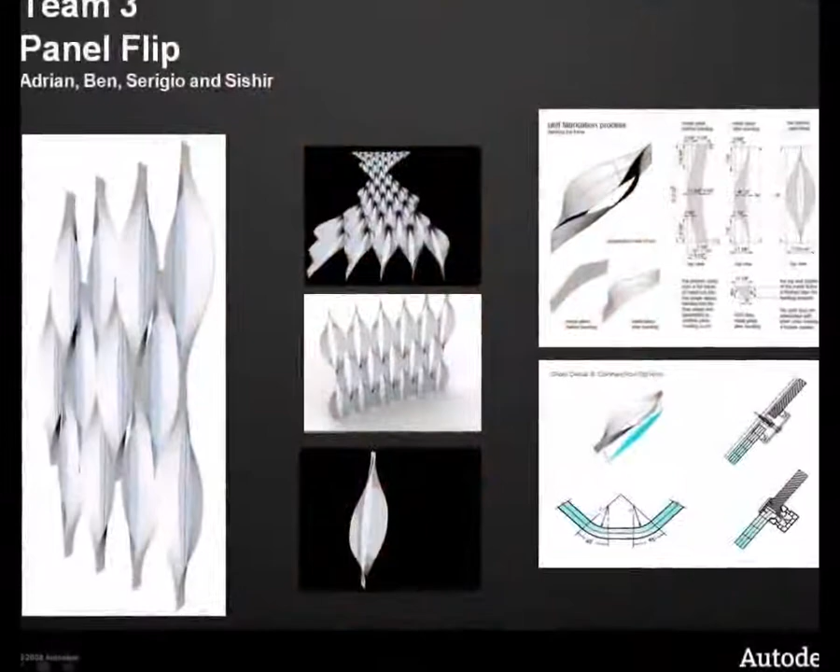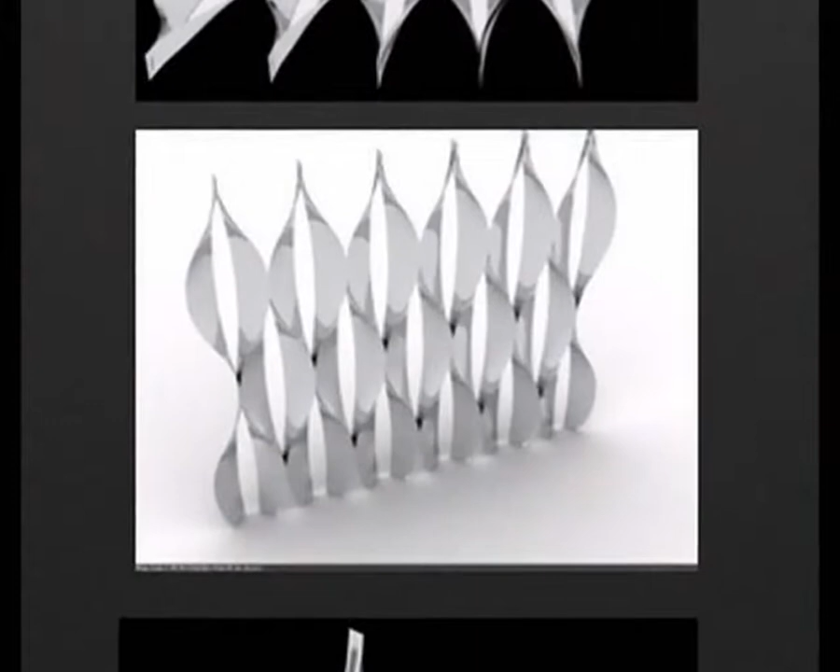A thumbnail project is basically taking some kind of inspiration from either an unbuilt project or a sketch that had come up in other architects' work. So we all went around and looked on the internet and in books for examples of projects that were exciting in some way, and found a way that we could capitalize on that and make it our own, with our own detailing of this original concept.

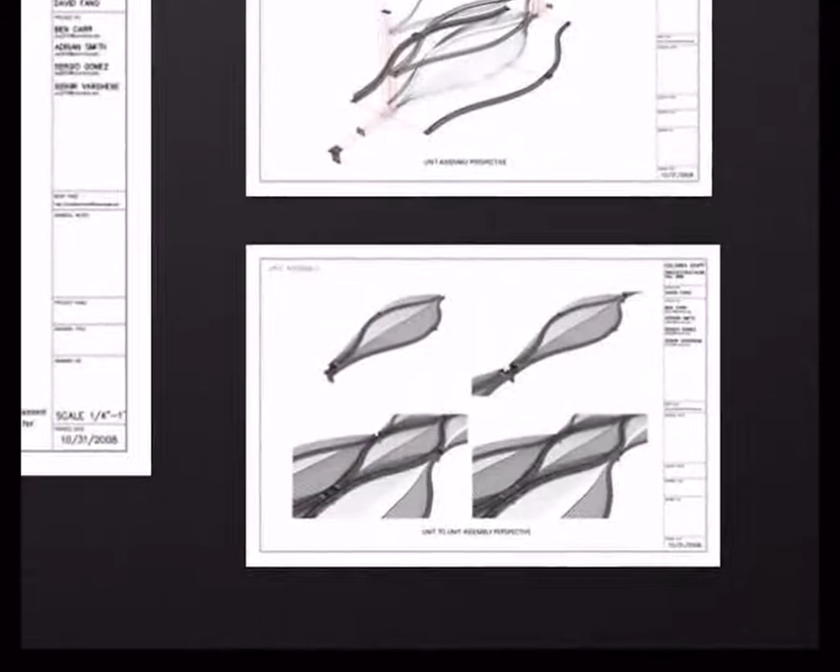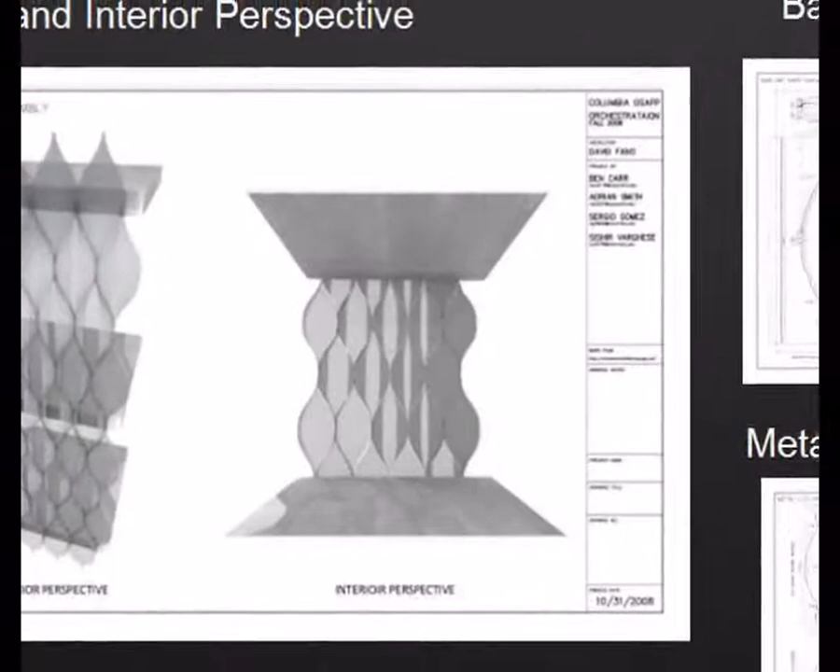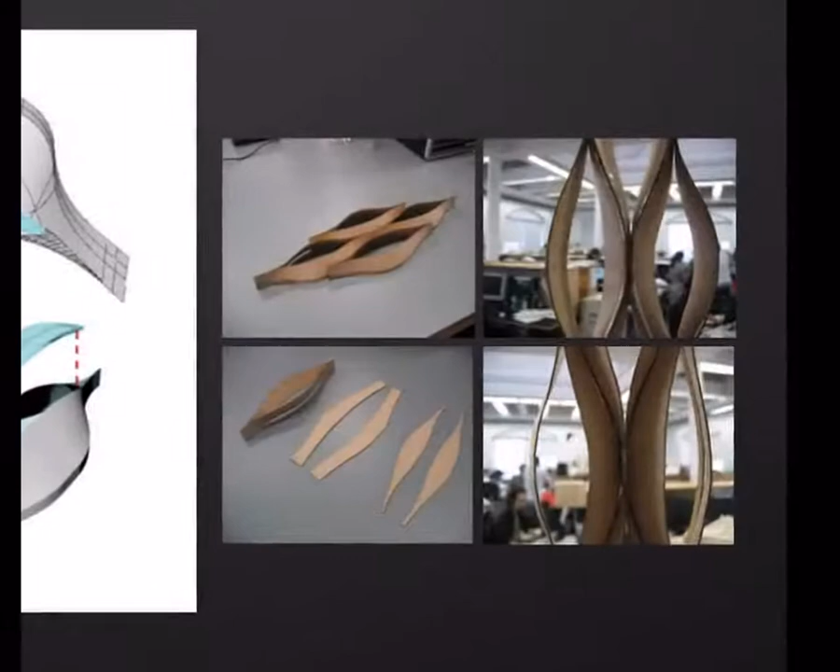What our group actually did, our blog was Orchestration FO8, but we had an original scheme from a project by Foreign Office Architects for a swimming pool, a roof structural system which wasn't really a unitized system or a curtain wall at all. It was really just a formal gesture that we liked. So we took that and completely translated it into a curtain wall, putting it in a completely different orientation, and eventually a completely different form, just because it came out of this original teardrop shape that we liked. It then translated into a whole different thing, which we now have complete authorship of, even though originally it was somebody else's project.

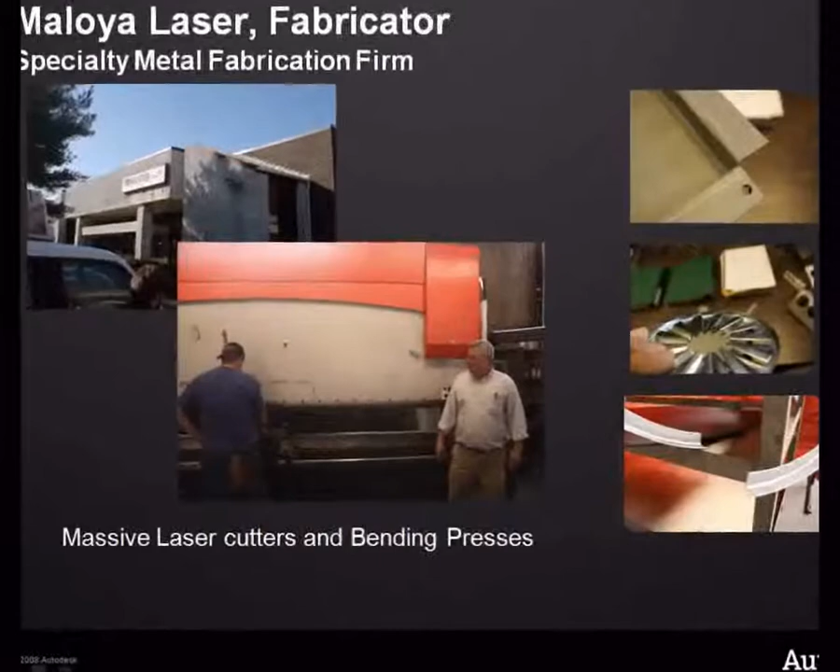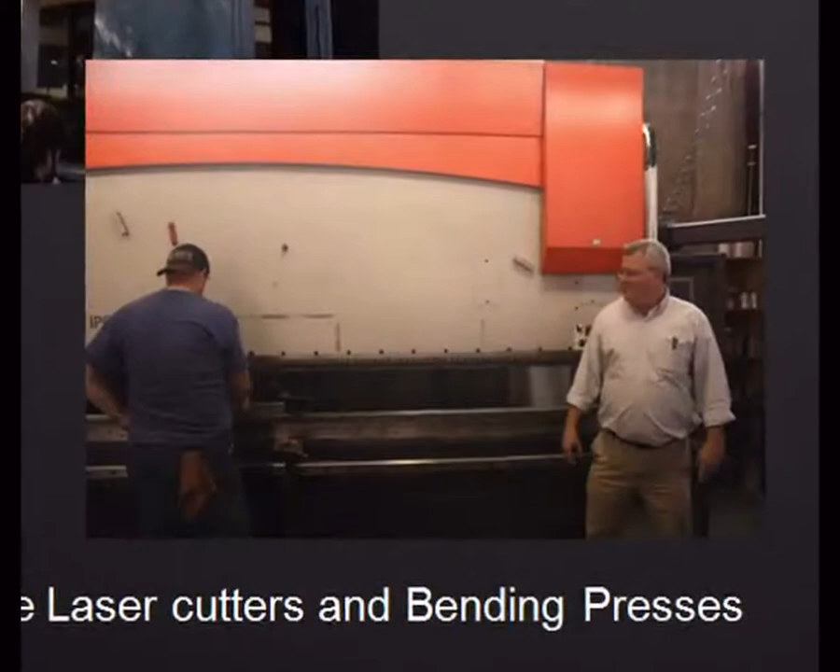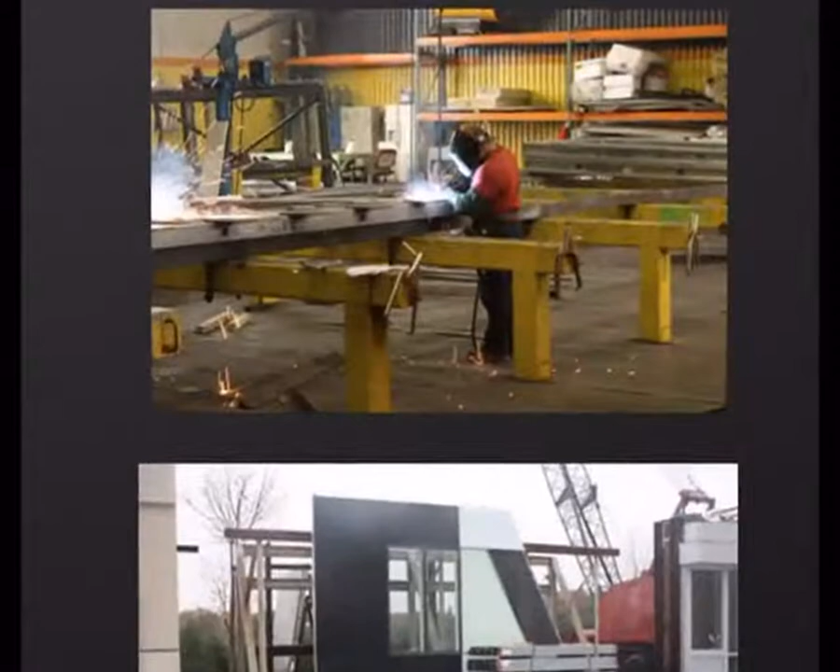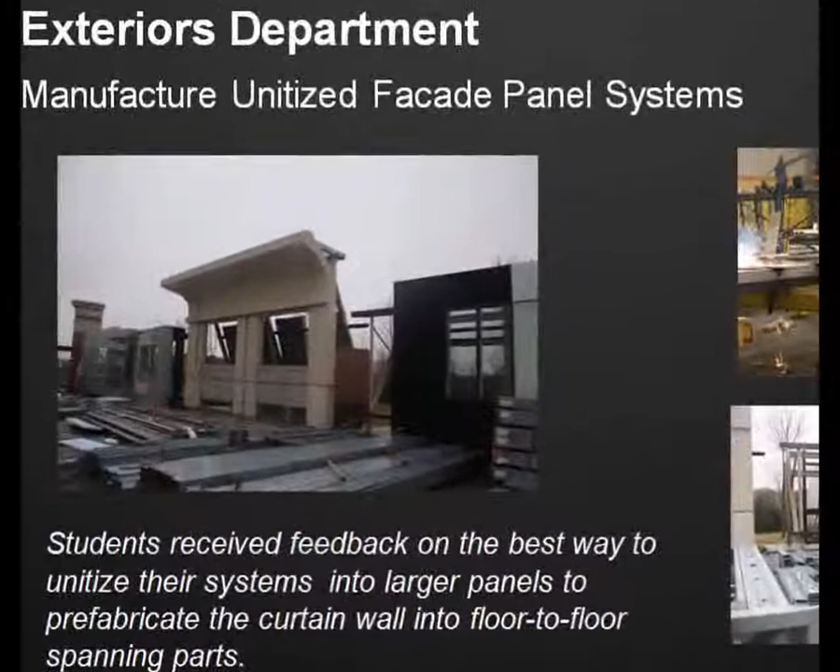So it was different from what I think a traditional design-build studio would be more like. You definitely had the interaction with the fabricators. In prior design-build experience, what we did was more like we just figured out in our heads, like, let's just try this and let's just try that, without having the better knowledge and the real-world situation where you actually go out to a fabricator and have a dialogue with those people. I think that's really important, and I think that's what made this class actually better than an actual design-build.

One of the fabricators we went to was called Maloya Laser, and they just do laser cutting of metal. So it was great to see exactly the kind of parameters that they deal with — things like how big the beds of the laser cutters are, and how big the sheet metal comes in standard sizing, and things like that. So that factors into the whole design process, because you don't want to design something that's going to be impractical just because it happens to be six inches longer, since that's an arbitrary number you gave to it.

If it can fit within these particular parameters, and you can embed that kind of logic into the modeling process, then it'll streamline everything down the line. So if you know ahead of time what your parameters are going to be for the manufacturing, then it helps tremendously once you actually try to get it built.

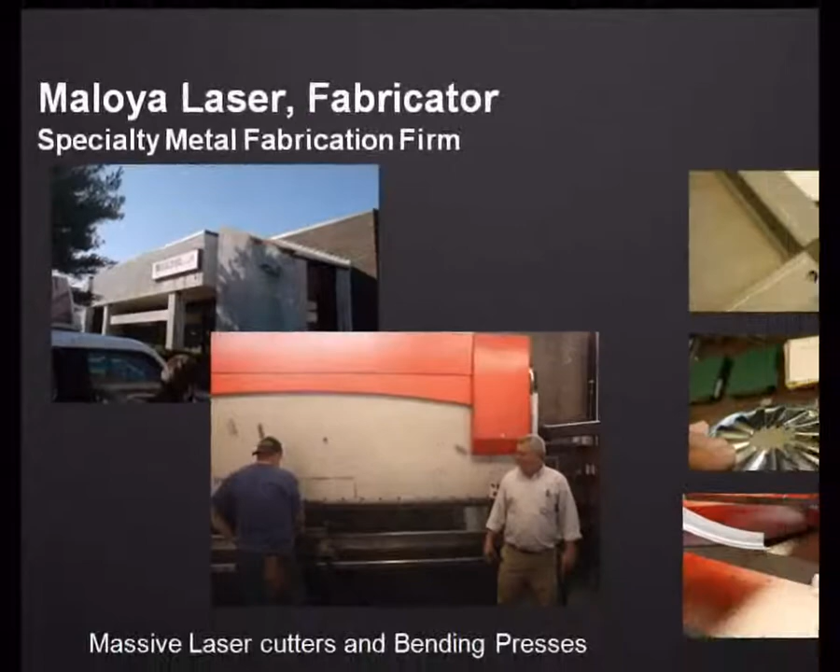Debra's conversation with the students now shifts back to Chris Powers for the final portion of this slidecast. In the segment that follows, Chris responds to Debra's request that he comment on what he sees as the future of building information modeling, especially as it applies to working with other disciplines such as fabricators.

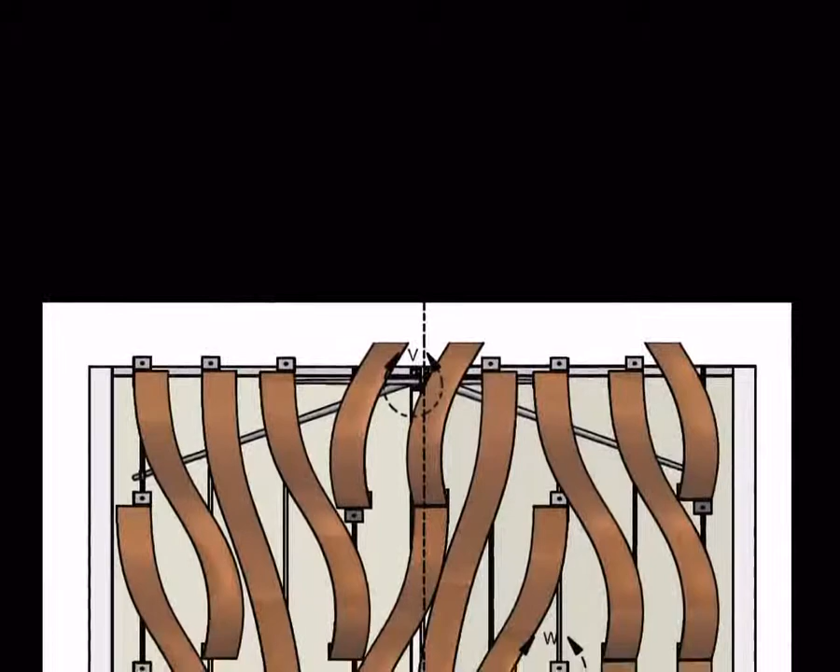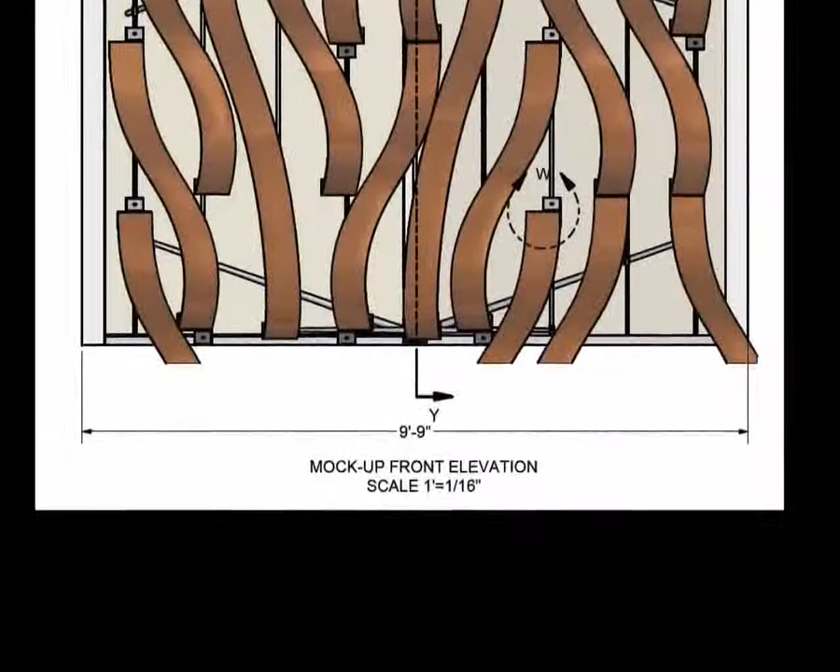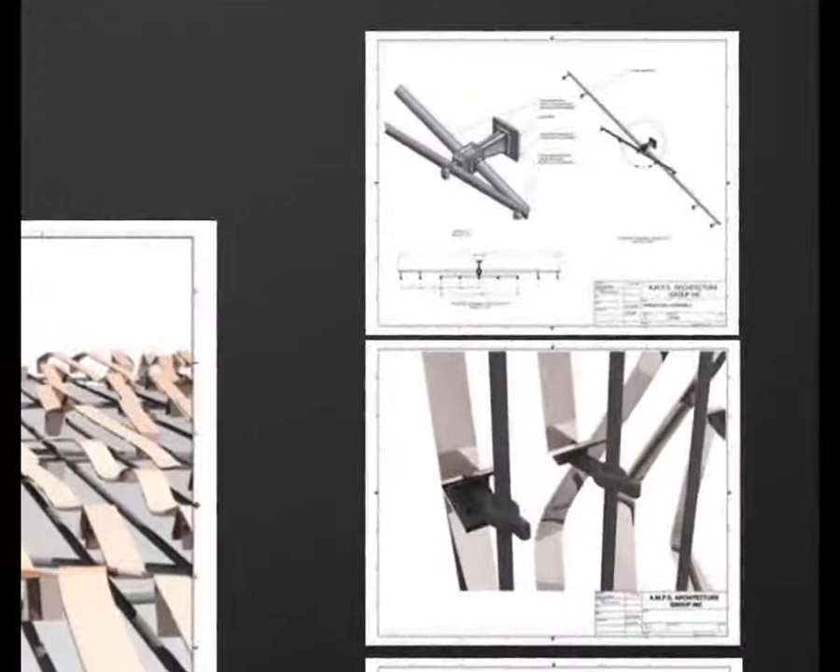I'm really looking forward to the use of this BIM, building information modeling, which Revit touches on, and I'm really hoping that this Inventor program kind of gets incorporated into that, and having almost a seamless interface between fabricators, architects, engineers, and contractors, really giving them a common language to speak with, because just by understanding the software and how these pieces get put together, I can understand how the fabricators can put them together.

And he can understand how I've designed this because he knows how the program works. And he knows, oh, if you could do this, it's only slightly different - it gives you the same look, but it's easier to build. By using that kind of common language, I think it gets rid of a lot of the misconceptions, a lot of the differences between the two different fields, and is really going to lead to hopefully a seamless interface.

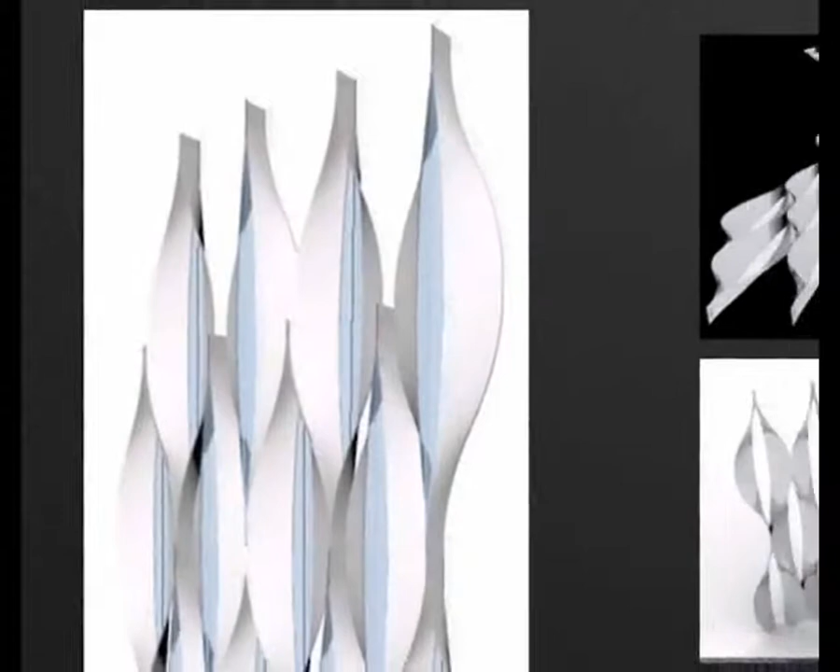that we can go back and forth using the same program, same file, just trading the file back and forth, doing small little alterations and really being able to communicate effectively. And that's really the key. So this fabrication process is communication, and to give another tool for that communication is a really great experience.

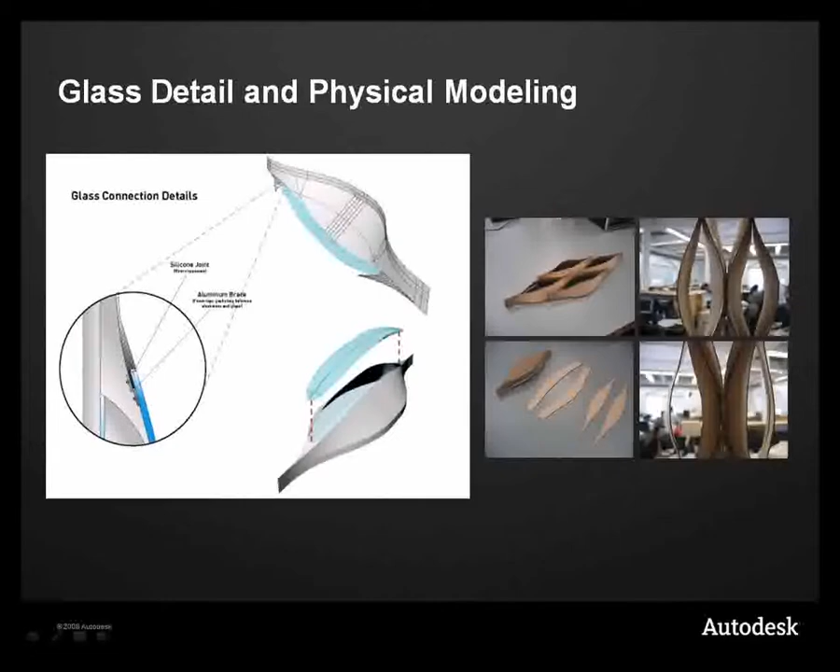To conclude, Debra asked Chris what advice he has for students entering the architectural program.

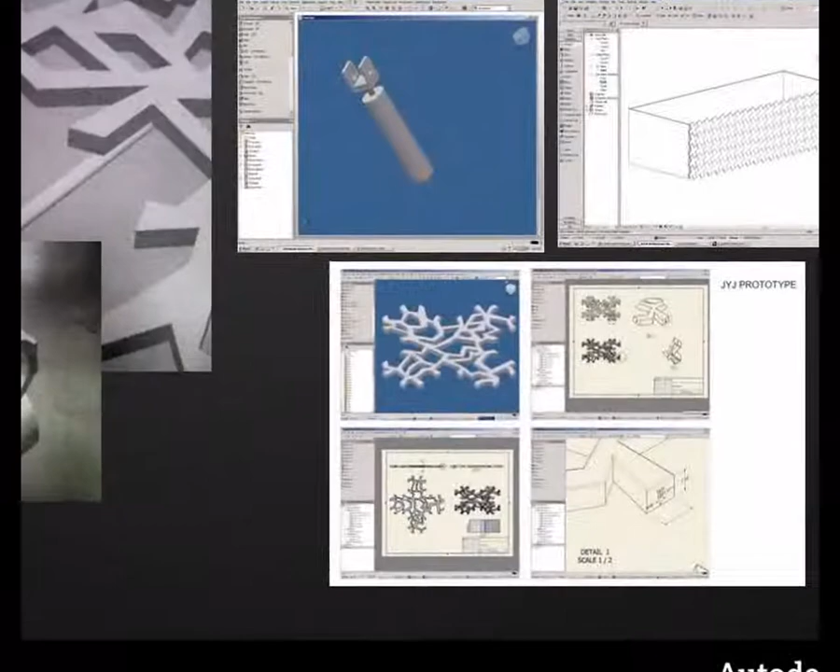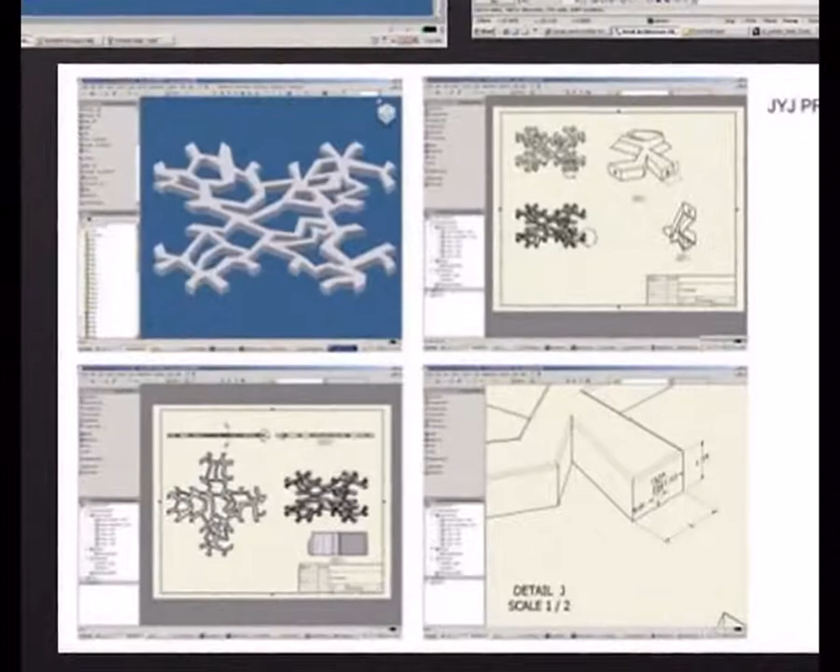The biggest advice I would give them - in the couple years that I've worked as an experience, one of the things I've learned is the construction industry is really kind of segmented as much as it is dependent on each other. So contractors have extreme problems with architects. Architects have problems with engineers. And this is all based on the fact that each person is focused on their field and doesn't really understand the others.

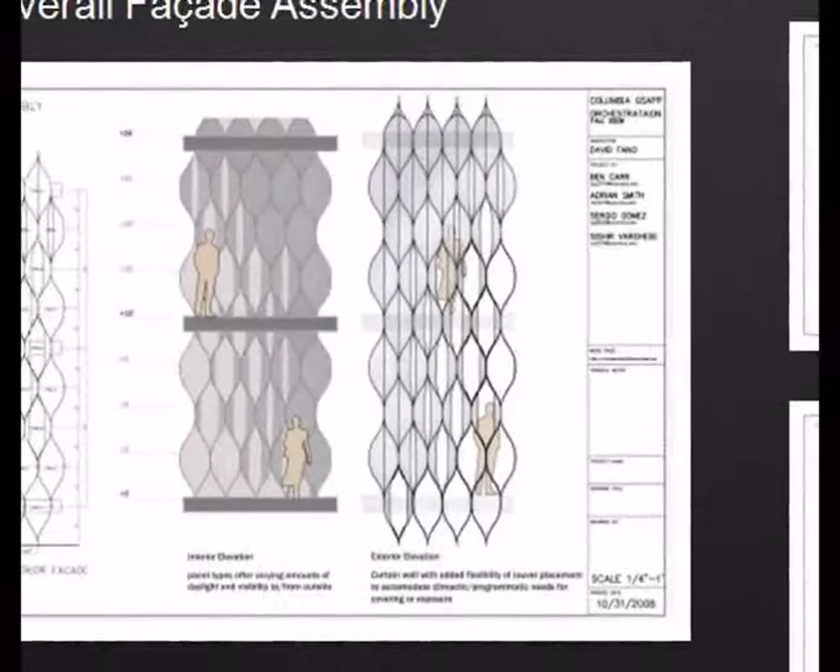So as an incoming architect, I would really recommend to just delve in as deeply as you can into how fabricators work, how contractors work, how engineers work. By understanding that, you can get rid of a lot of the simple miscommunications, misunderstandings that really kind of ruin a relationship that's almost key and essential to how a building is developed.

One of my best experiences was over the course of 7 or 8 months working with a contractor on a middle school project in D.C. I was able to understand that simple things that designers often do, such as moving a wall 2 feet to add some design space, can have drastic implications for a contractor and can mean 2 or 3 weeks worth of work. Understanding that and being sensitive to those kinds of issues on all different scales...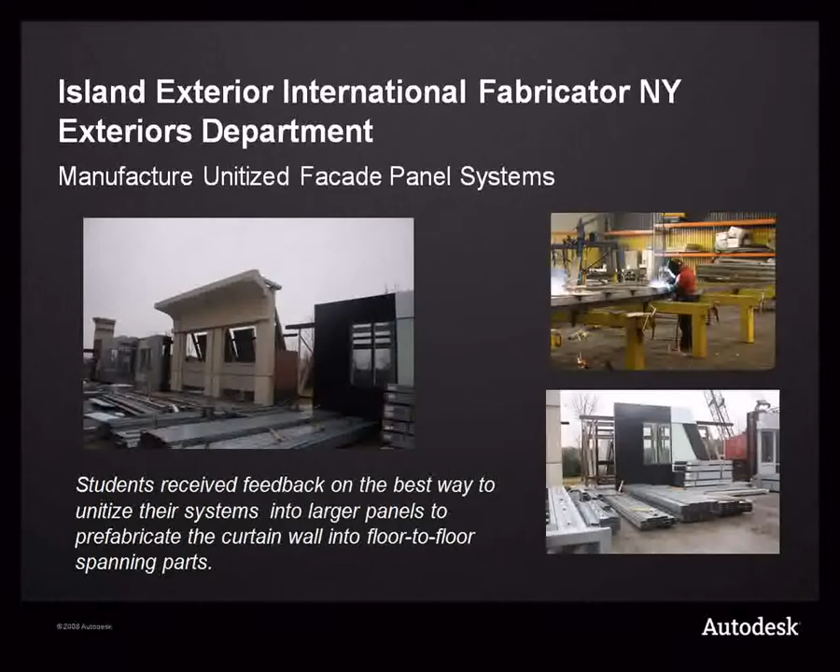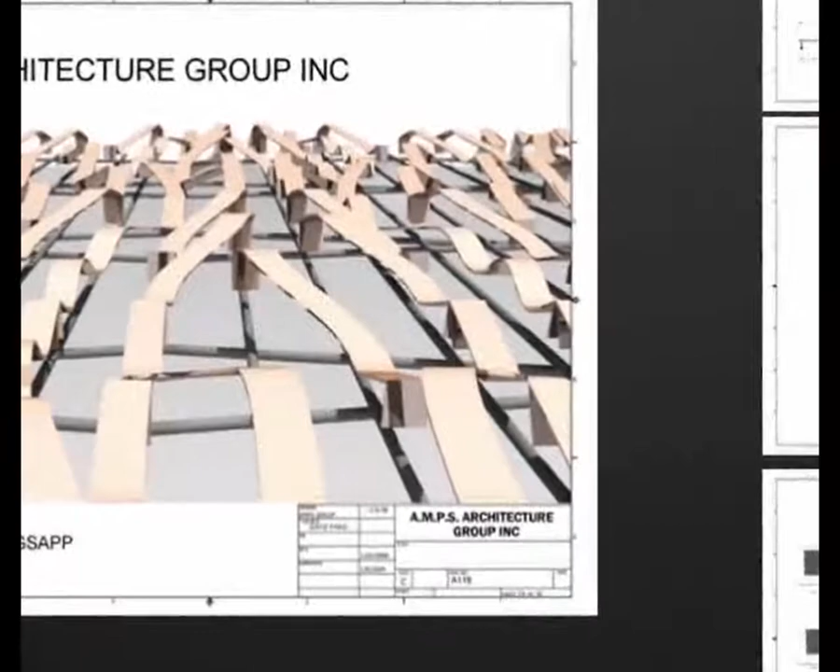you can really develop a good relationship between the architects and engineers and become a seamless design, getting your work built faster and better with less complications and less cost in the end, because a lot of costs are created by changing things and contractors wanting to up the bid and so forth. So that would be the one thing I would recommend to students - understand the different fields outside their own as much as possible to coordinate that.